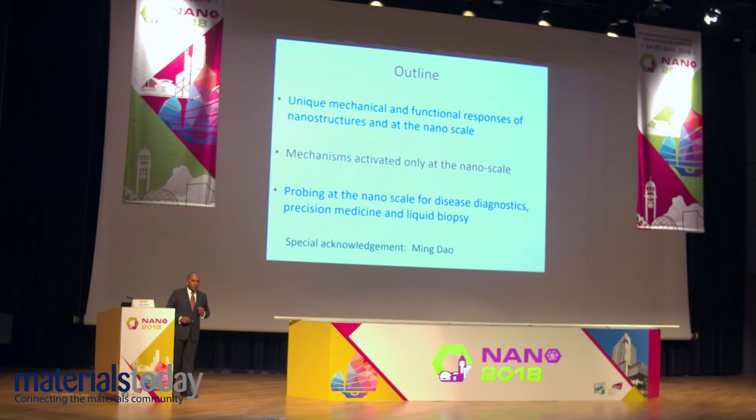So the outline for my talk is as follows. I would like to start with listing a few of the things that are unique to the nanoscale, then focus on mechanisms that are activated at the nanoscale, and then most of this talk will focus on advanced materials, material science. But given my path over the last 15 years, I would like to end the talk with one example where nanoscale features play a very important role in disease diagnostics, precision medicine, and liquid biopsy.

So what are some of the things that are unique to nanoscale? There are many, and I cannot list them all here. I'm just going to focus on a few of these. Of course, we have very high surface to volume ratio, low defect density in many of these systems, and proximity of these defects to free surfaces, limited number of defect nucleation sources, such as Frank-Read mechanism for dislocation multiplication, etc.

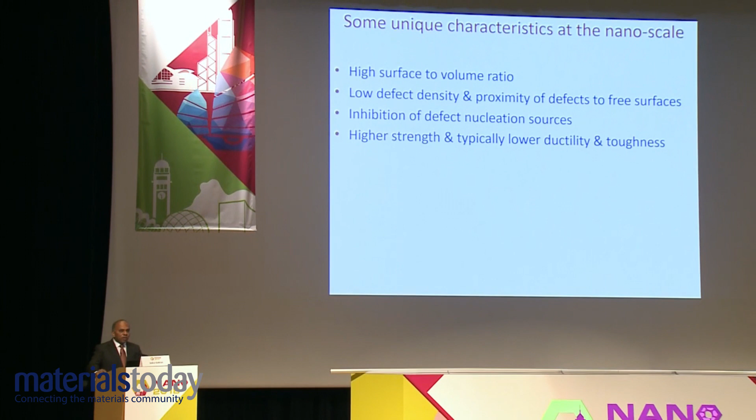Inhibition of defect nucleation sources, typically with decreasing grain size, very rapid increase in strength through Hall-Petch type mechanisms, and of course as the grain size approaches very small dimensions, the so-called inverse Hall-Petch relationship.

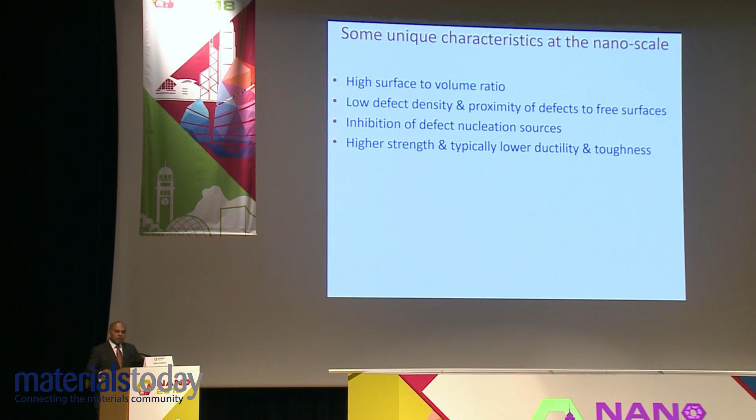Typically, increase in strength is accompanied by low ductility, toughness, damage tolerance, and resistance to fatigue crack propagation. Greater environmental susceptibility and possibly toxicity as well in some cases.

But there are also some advantages of nanoscale structures. We showed a few years ago that if you take single crystals of, say, aluminum, the mere act of mechanically cycling it at room temperature so that you impose a stress that's large enough to unpin dislocations and move them close enough to the surface so that the image forces can attract them and take them out of the system, but not large enough to create new additional dislocations, can lead to healing of the material, which is essentially a beneficial fatigue effect due to cyclic loading.

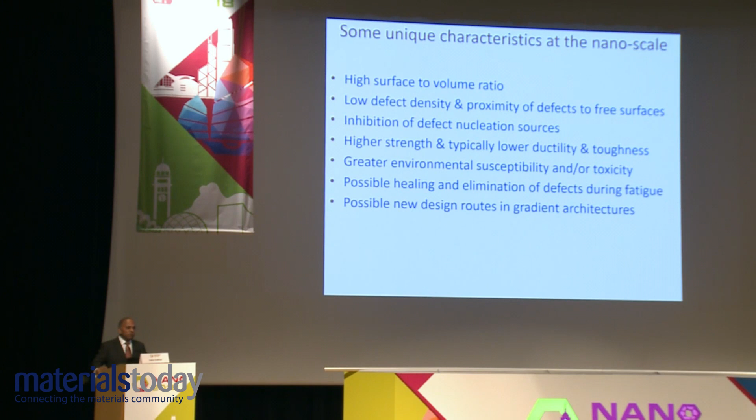Elimination of defects due to mechanical loading in certain nanosystems under certain conditions. There are a number of gradient architectures that one can create with nanostructures, not all of which have yet been tried in research, which have potential for significantly transforming material design and surface design, and I'll show some examples of this. And of course, many more.

One of the nice things about nanostructures and nanoscale materials is that combined with advanced additive manufacturing techniques such as 3D printing, one has the opportunity to create unique new architectures and materials that are digitally designed, involving both computational and experimental approaches. I'll show some examples, not through 3D printing, but that can potentially be applied through 3D printing as well.

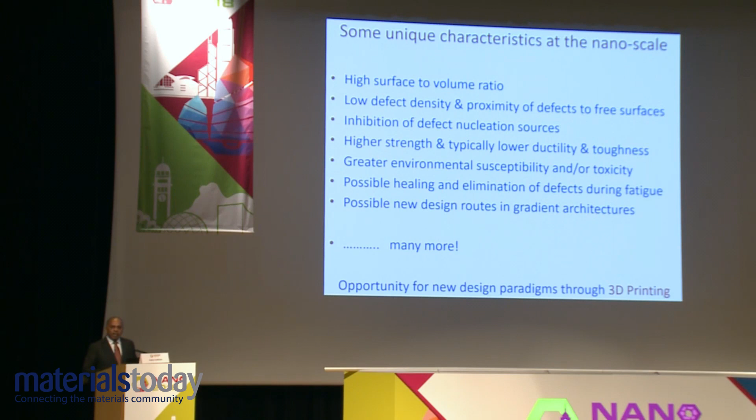So rather than going into general things, I thought I'll focus on a few examples and go into them in sufficient detail. Since we are in Hong Kong, I'm really delighted to show the first example, because this is some very recent work from a couple of months ago, where in collaboration with colleagues from the City University of Hong Kong, we showed some phenomena in diamond which can only happen at the nanoscale.

So essentially, bending of diamond at the nanoscale. Colleagues at the City University of Hong Kong, here the names are listed, Professor Zhang and his co-workers have been working on nano diamond for quite some time. If you take a silicon substrate and deposit a thin film of diamond on top of it through plasma-enhanced chemical vapor deposition, and then use etching to create needles where the height of the needles is of the order of 200 or 300 nanometers, and the diameter is probably less than 100 nanometers, you create many of these diamonds on a substrate.

We all know that diamond is the hardest material found in nature, and it's very difficult to deform diamond elastically beyond a small amount. Typically, when you go to a strain of as small as 0.15, 0.16%, diamond undergoes catastrophic fracture. It has high strength, of course.

So is it possible under nanoscale to deform diamond to sufficiently large reversible elastic deformation that cannot happen under micro and macroscopic conditions? That was the fundamental question.

So we decided to try this using some of the latest tools that have become available in the last 10, 15 years or so. We take these diamond needles on a substrate inside an SEM where we can use a diamond tip in a nano indenter to either push it down or come sideways and bend it and see how much it bends. And we can try to impose different amounts of controlled elastic deformation.

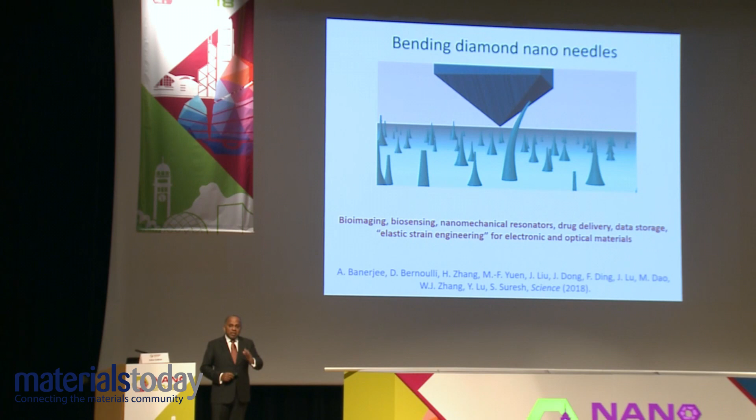Now, why would we even expect or hypothesize that there is the likelihood of large elastic deformation in diamond? First of all, at the nanoscale, if you can create pure surfaces, the possibility of defects in diamond is relatively small. In single crystals and very small volumes, the possibility of creating smooth surfaces and defect-free materials is large. So maybe there is an opportunity at the nanoscale that we are able to deform diamond.

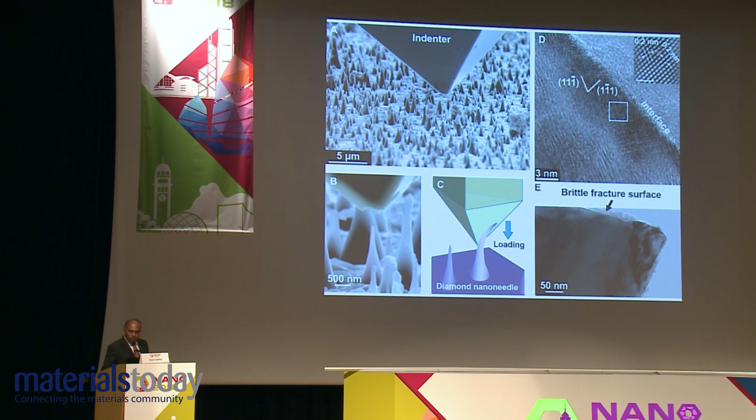So here is a series of still images from the videos taken in the experiment showing how the diamond deforms. This is in a single crystal. In the top row, as the indenter tip comes down and starts to deflect the diamond, you can see the diamond being bent, the needle tip being bent.

And if you don't reach a critical threshold value of stress or force, but you retract the diamond tip, the needle goes back to its initial shape. That's what happens in the top row.

In the bottom row, if you do the same thing but exceed the point at which fracture is initiated, you see the catastrophic fracture in the middle of the figure, in figure B3, where the diamond needle is catastrophically fractured. And you see the fracture surface in B4.

Figure C shows the load displacement curve for this failure mode of pushing diamond. You see an elastic response. The blue data points show the deformation before catastrophic fracture. So we unload it, we go back, and then we reload it. You see a little bit of hysteresis because of friction between the diamond tip and the nano needle.

But if you redo the experiment after unloading, if you reload the same nano needle, you see the red curve. In the case of the red curve, we go all the way to the point of fracture where the diamond catastrophically fractures. To your extreme right is the finite element simulation that takes into account anisotropy and nonlinear elasticity.

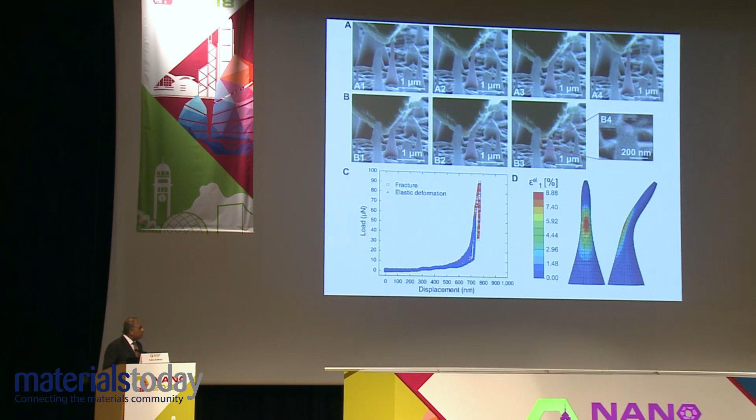What is plotted here is the maximum elastic strain, and in this case it's a tensile strain shown in different colors. The maximum point on the tensile side of bending, the strain is of the order of about 9%. So essentially, with diamond, we can deform it at the nanoscale in a way you cannot do at macro or micro scale, locally to a maximum strain of up to 9%. That's what this shows. Now you see that in video, both experiment and simulation.

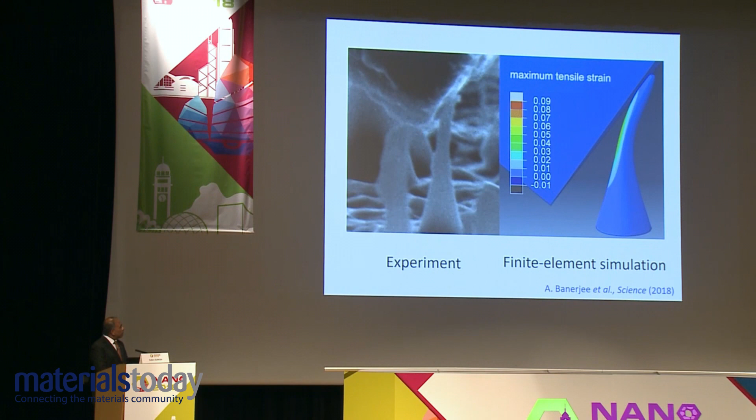When you do a large number of these repeat experiments in single crystals, there is a little bit of friction. So in our computational simulations, we tried to understand the effect of friction on the strength that we get. What is plotted here is maximum elastic tensile strain for single crystals under two different conditions.

Elasticity refers to deformation without fracture, where we unload. What is the maximum stress, maximum tensile strain we can get without fracturing? And in the case of specimens that fractured, what is the maximum tensile strain? Of course, when we create these diamond needles by etching, there is variation in geometry, friction, height, etc. So it's not surprising that you get quite a bit of variability in experimental data.

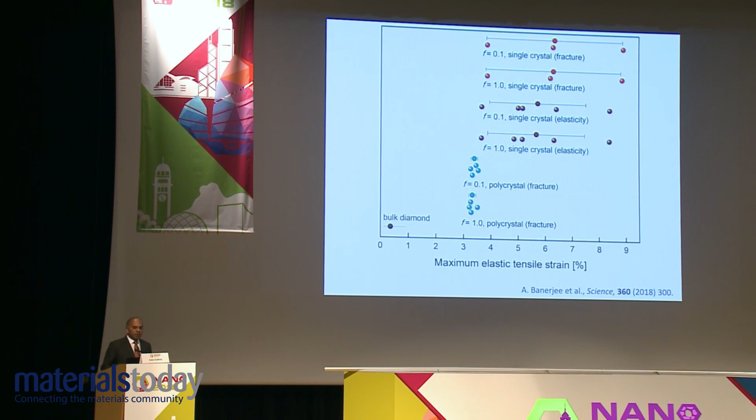What you find is that the maximum elastic strain in the single crystal case is between 4% and up to 9%. We also did experiments in polycrystalline diamond, where the scatter is much smaller. You can see the data for elasticity and, in the case of fracture, for two friction coefficients, 0.1 and 1.0. In both cases, for polycrystalline diamond, you get a maximum elastic tensile strain of about 3% or so. For comparison, bulk diamond has a much, much lower tensile strain, as expected.

We also did density functional theory and molecular dynamics calculations of stress strain curves. What is plotted in black is the stress strain curve from a DFT-MD calculation, where we found that the maximum tensile stress is of the order of about 140 GPa, and the tensile strain at which fracture is initiated, at least according to the calculation, can be as high as 13%. That's the point at which carbon bonds tend to break in this particular simulation.

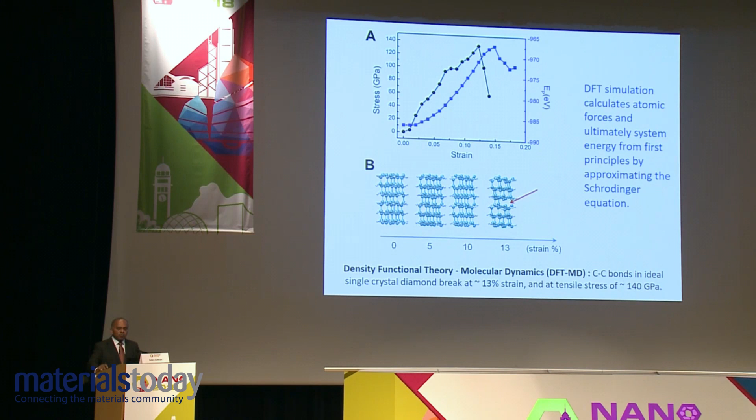When this paper's findings were reported a couple of months ago in Science, in an introduction to our article, Professor Javier Llorca from Madrid presented this figure in a perspective, which was very interesting.

The maximum tensile strength that has been achieved in one-dimensional carbon, which is carbon nanotube, is of the order of about 100 gigapascals. In 2D carbon, or graphene, the maximum strength shown is of the order of up to 120 GPa. In our experiments in nano needles, the maximum strength in 3D that we demonstrate is of the order of about 100 GPa. This is an interesting way to look at this.

There are a number of potential applications of these kinds of effects. There is an entire field called nitrogen vacancy centers, where you can create a vacancy with nitrogen, and that has unique optical and optoelectronic properties. There is a whole community of physicists working on this in diamond.

You also have diamond as a biocompatible material being used or studied in research for biosensing, bioimaging, and drug delivery applications. Because diamond is also an electronic material, there is a significant opportunity to change band gap as long as you can induce elastic strains through so-called elastic strain engineering.

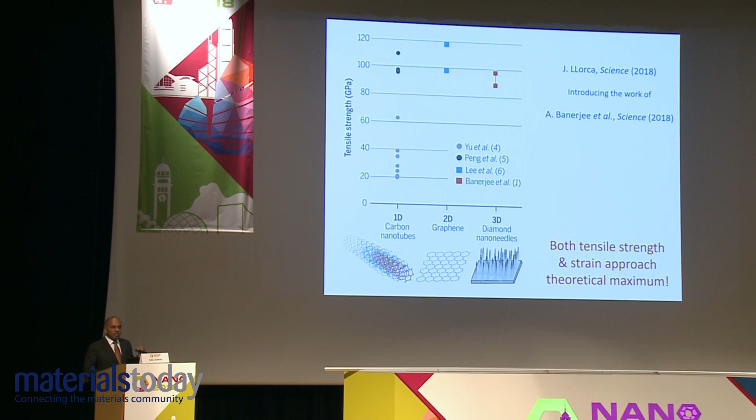So from that, I want to move to my second example. As we all know, everybody in this room has been working on aspects of this for a long time. One of the challenges we face in material science is to design engineering materials where, either through grain refinement, processing conditions, or composite strengthening, we significantly increase the strength of a material, something else gives. From a mechanical structural perspective, what gives usually is ductility, damage tolerance, fracture toughness, and fatigue properties.

So is there an opportunity to create various strategies so that we can increase the strength significantly, but at the same time try to protect a significant fraction of ductility, fracture toughness, and fatigue resistance, and in the process make sure we have enough damage tolerance and tribological resistance of the material for surfaces. This has been a topic of research for a long period of time.

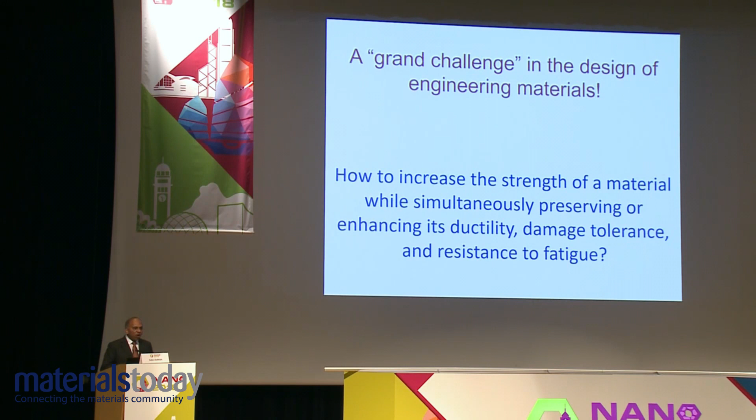I want to highlight a number of phenomena that have been identified by many people that happen only at the nanoscale. Professor Jian Lu, our conference chair, and his colleagues have been working on a particular type of structure where you can induce twinning through mechanical means here in Hong Kong. There are other techniques that have been proposed.

So I was in Doha in Qatar about 4 years ago. From our hotel room we looked out the view, and there was a nice building, and my wife said, 'Isn't that a beautiful architectural design?' And my first thought was, that's a very nice twinned microstructure, being a material scientist.

So this is an example of a macro twin. Professors Lei Lu and Ke Lu in Shenyang have been working for the last 12 years or so creating various strategies of inducing nanotwins which show unique properties.

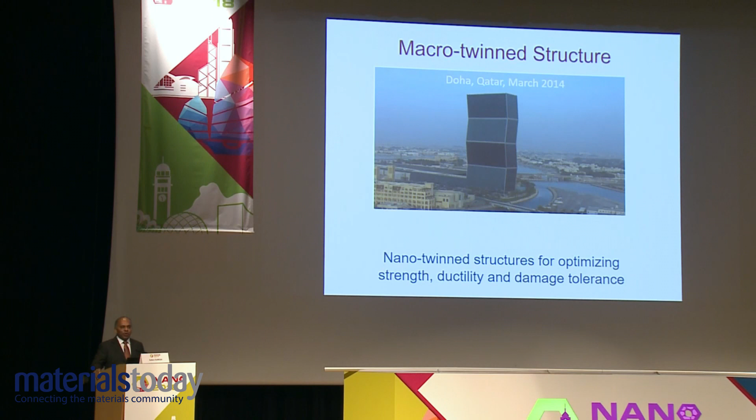Some of their work showed that perhaps we can use nanotwins not only to significantly elevate strength, but also to preserve ductility. So about 9 years ago, Lei, Ke, and I looked at some of their results and some of other people's results in the community, and tried to identify minimum criteria required to ensure we have the opportunity to maximize strength while preserving ductility.

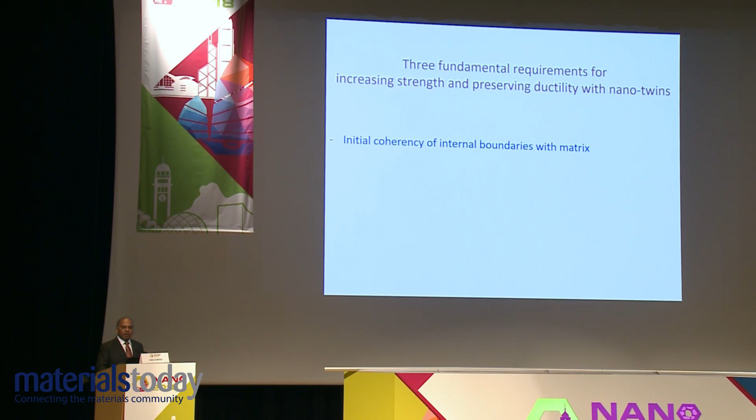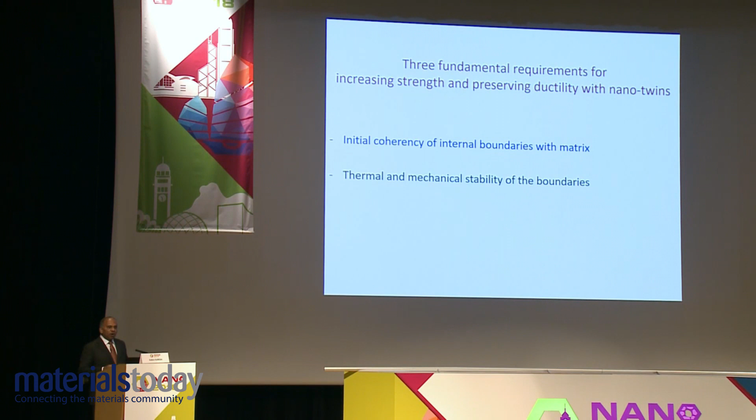What are the requirements? We identified 3 requirements. You need to create internal boundaries that at least have initial coherency, mechanical coherency, with the surrounding matrix. You need to have thermal and mechanical stability of the boundaries during mechanical loading, whether it's monotonic or cyclic loading, at room temperature or at elevated temperatures.

And then in addition to that, there is something unique about the nanoscale, things that you don't see at the micro scale. At the nanoscale, if the internal boundary feature size is typically finer than 100 nanometers, then if all 3 conditions are satisfied, you have an opportunity, at least in theory, to create a structure that has increased strength and the potential for reasonable ductility.

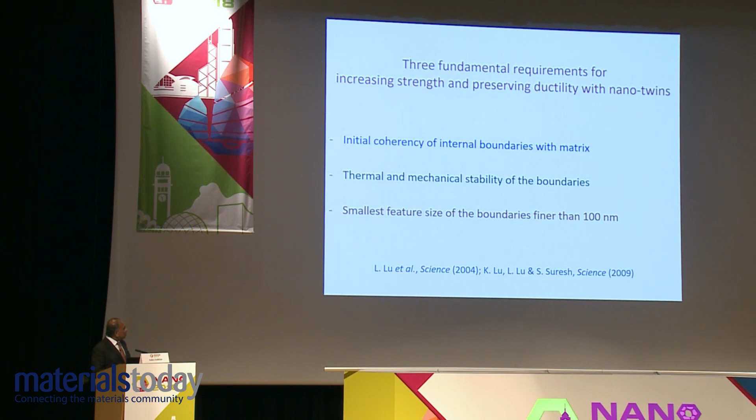And of course, these specimens have been manufactured using techniques where we cannot create very large structures for very large structural components, at least not yet. So in an article in 2009, we looked at the effects of these, and here is an example of a typical microstructure that has been produced.

On the left-hand side you have copper, a very finely twinned material, where the twin spacing, lamellar spacing, is on the order of a few tens of nanometers. The middle one shows something on the order of 70 or 80 nanometers. And on the right-hand side you see a material of the same grain size, but essentially no pre-existing twins.

So if you compare the 3 cases, obviously with very finely spaced twins you get the highest strength. You also have the opportunity to get higher ductility and even some beneficial fatigue properties. But there are other artifacts of this.

The activation volume of these materials is very different than conventional materials. And the other interesting result that comes out of this is the twin spacing in these nano-twin microstructures has an effect that's very similar to grain size effect in nanostructured materials, nanostructured metals.

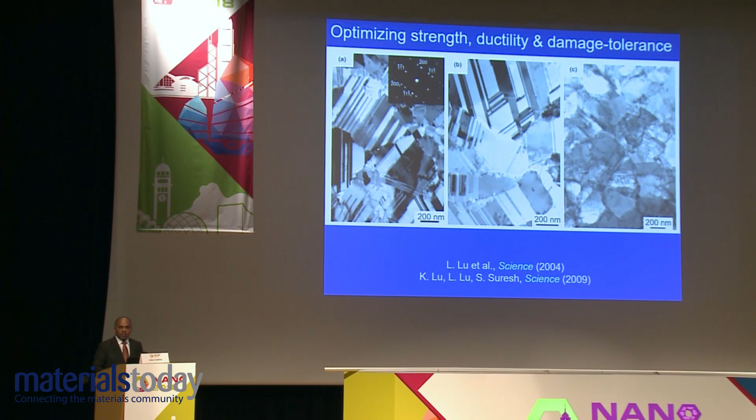So this is an example of one strategy that has been used among many, and I'm not going to go through all of these strategies. But one of the problems with this is, first of all, you don't get a big enough specimen to do the mechanical loading that is required, the minimum specimen size needed to do a valid fracture experiment or a fatigue experiment.

So now let's see what nanostructured materials do, how they behave when it comes to fatigue, which is one of the most critical practical applications and one of the most challenging as well.

So this is a classic SN fatigue curve that you would see, and here is an effect of grain size on SN fatigue life, as well as number of cycles to failure and the fatigue endurance limit. If you have a conventional microcrystalline material, this is nickel, a pure nickel, with a grain size of 10 micrometers or so, you get a few hundred megapascal endurance limit, approximately 40 to 60% of the yield strength or tensile strength of the material.

When you go from microcrystalline to ultra-fine grain material, when the grain size decreases to about 300 nanometers, your endurance limit increases by more than 50%. If you now go from ultra-fine grain to nano-grain material, where the grain size is of the order of 30 nanometers—this is electrodeposited nickel—the endurance limit still increases. So in high cycle fatigue, which primarily captures the life to initiate fatigue cracks, you get a beneficial effect of the high strength because of grain refinement in a nanocrystalline material.

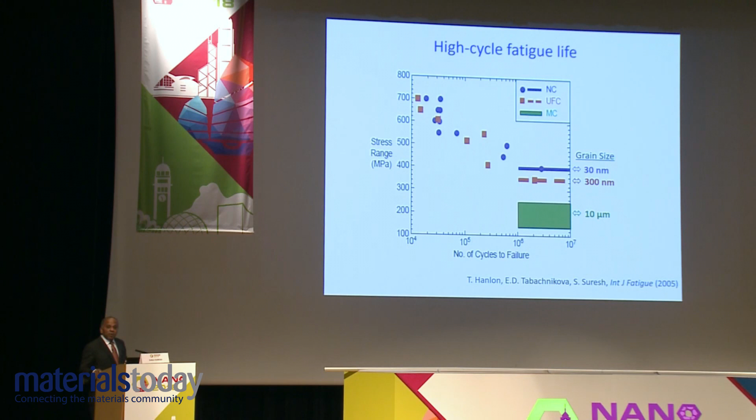But then, if it's strain control fatigue, you will see there is almost no data in the literature. There is very little data done with large specimens, because specimens aren't large enough to do a valid cyclic deformation test by controlling strains. So when you go to low cycle fatigue, you run into the problem that the beneficial effects of grain refinement begin to disappear.

The same thing happens in the case of nanostructured materials, shown on your right-hand side, with data in nanocrystalline nickel, ultra-fine grain nickel, and microcrystalline nickel. So what is beneficial for high cycle fatigue is actually not so good for fatigue crack propagation, especially at low crack propagation rates in the near threshold regime, where conventional coarse grain materials perform much, much better than a nanocrystalline material.

We can try to overcome that by tricking the material by introducing initially coherent internal boundaries at the nanoscale, which are also thermally and mechanically stable. And that's what is shown on the left-hand side.

So for 3 different nano-twin cases, you have twin spacing of 30 nanometers, 85 nanometers, and 450 nanometers. This is work done in collaboration with Lei Lu and her student in Shenyang, and my PhD student, Aparna Singh, at MIT. What you see here is that when you introduce nano-twins, there is an opportunity not only to preserve ductility while increasing strength, but also to provide some improvement in fatigue crack growth resistance.

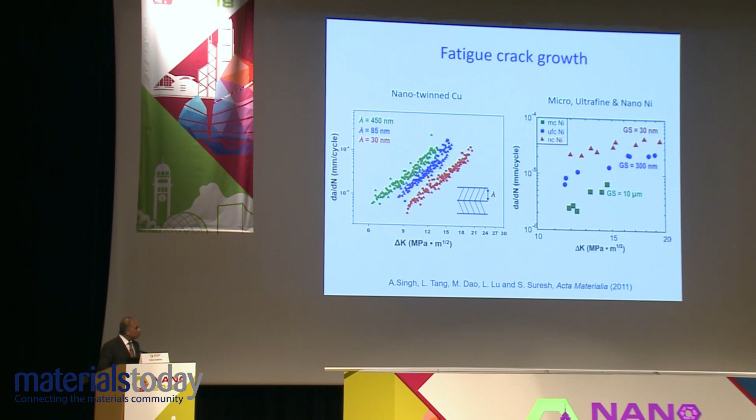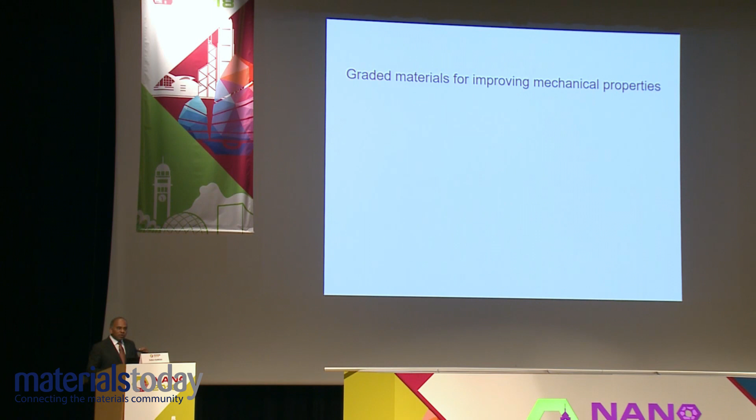For this, we resort to graded materials as a strategy. I'm going to show some very recent results, again in collaboration with Lei Lu and her team. But before going to that, I want to give a little introduction to what has been done by different groups in different mechanical properties with respect to graded structures, so that we can try to apply what we know for the last 20, 30 years to the nanofield and try to see if we can improve the properties.

Starting in the late 1980s, primarily through leadership from the Japanese materials research community, there were a lot of international conferences that were held, and a lot of very interesting work came out of it at that time.

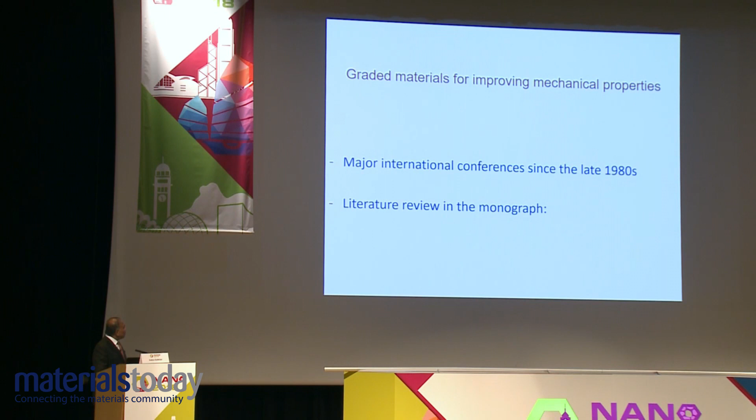Then there is a lot of literature survey done by many people, and I'm particularly grateful to Professor Andreas Mortensen in Lausanne, at EPFL Lausanne. We spent about 2 years in the late 90s summarizing the field and certain strategies in a monograph called Fundamentals of Graded Materials, published by the Institute of Materials in the UK in 1998.

Out of this emerged some strategies that I want to walk you through. Now we can try to apply them to nanostructured materials.

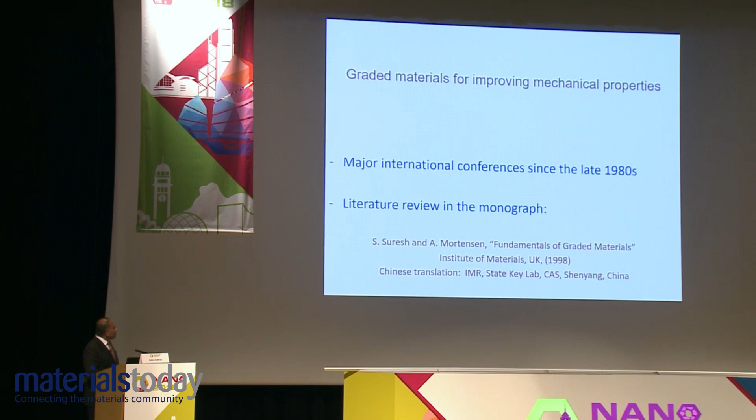The first piece of work that systematically, in a scientific way, demonstrated the benefit of nanostructured materials was in the late 1990s in ceramics. This is some work in collaboration with Professor Nitin Padture, who's now at Brown University, who at that time was at the University of Connecticut in Storrs.

Nitin and I had a number of joint students who were looking at ways in which we can create an elastically graded material that had no plasticity. Here is an example of a particular system. We take silicon nitride, fully dense silicon nitride, and then we take SiAlON glass on top of it. We melt the glass, and we can dope the glass in such a way that the coefficient of thermal expansion of SiAlON is very similar to the coefficient of thermal expansion of silicon nitride.

When you melt it, the glass diffuses into the silicon nitride substrate. Of course, glass has a Young's modulus of 110 GPa, and silicon nitride has a Young's modulus of about 300 GPa. So because of the diffusion, there is a continuous variation of Young's modulus at the surface of 110, about 200 GPa, 220 GPa, because it's part glass, part silicon nitride, to a depth of about 400 micrometers, where the Young's modulus is about 300 GPa. So that's the microstructure that you create.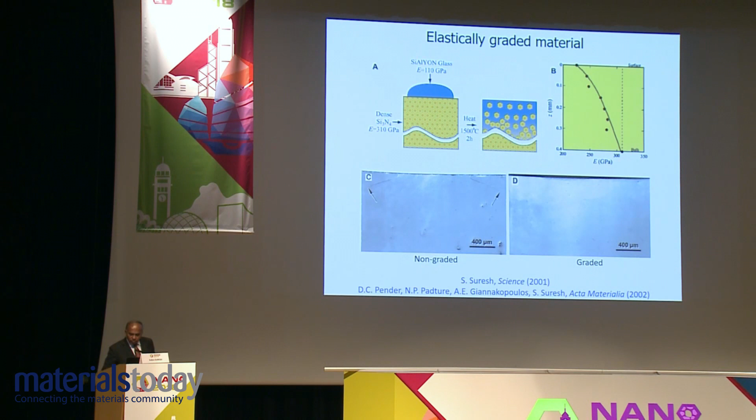And then a few years later at MIT, Ming and I had a joint PhD student, In-Suk Choi, who's now at Seoul National University in Korea. We looked at a plastically graded material where there is no elasticity gradient. So this is just the opposite of this. You have no change in elasticity, only a plasticity gradient.

So we create a surface layer, using some material that we produced at MIT in collaboration with Chris Schuh. We have a surface layer that's about 20 micrometers thick, a nickel tungsten nanocrystalline alloy. It has a grain size of about 90 nanometers. And then you have a small homogeneous layer of nanocrystalline material, and then a copper substrate. And then we do the indentation work.

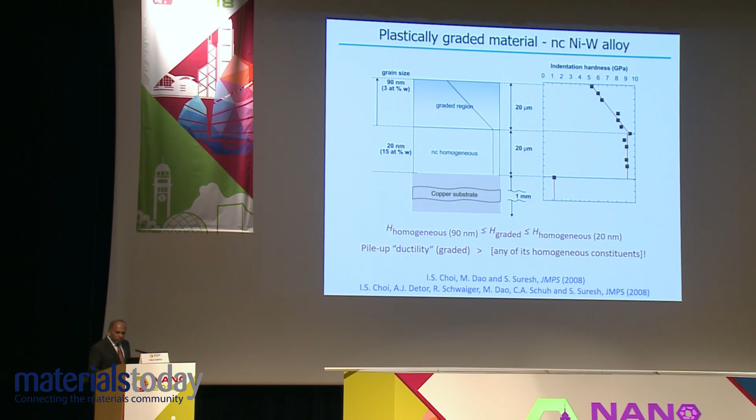And then we found the following: when you indent a graded material as opposed to any of the homogeneous materials, including the composite of different compositions, you find that the evidence of ductility in an indentation test, which is the pileup around the indenter, is the greatest in the case of graded material, because of the way you distribute the loads during indentation into the substrate for a particular mechanism. So this gave us an opportunity to look at plastically graded materials with nano gradients at the surface.

Here is the result that we found about 10 years ago. What is plotted here is the pileup height over the base height, HP over HR, as a function of microstructure. This is the nanocrystalline material only, coarse nanocrystalline material, and graded nanocrystalline material. This is experiment, and this is finite element simulation of the behavior. In all three cases, we find that the graded material has the most superior response in terms of indentation response, with one indicator of ductility being how the material is able to pile up.

So the moral of the story in all of this, whether it's an elastically graded material or a plastically graded material, you have the opportunity to trick surfaces to do things that you may not be able to do in a conventional way. This is where 3D printing, at least in principle, provides an enormous opportunity for design purposes.

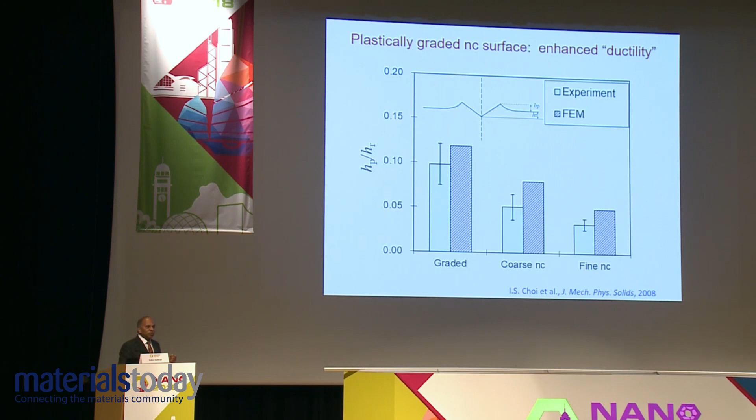Subsequent to this work, in the last 10 years, a number of groups in the community have published papers in various forums showing the possibility of creating graded nanostructures with which ductility-strength combinations can be optimized, homogeneous versus graded nanograin structures, etc. This particular figure is taken from a paper by K. Lu.

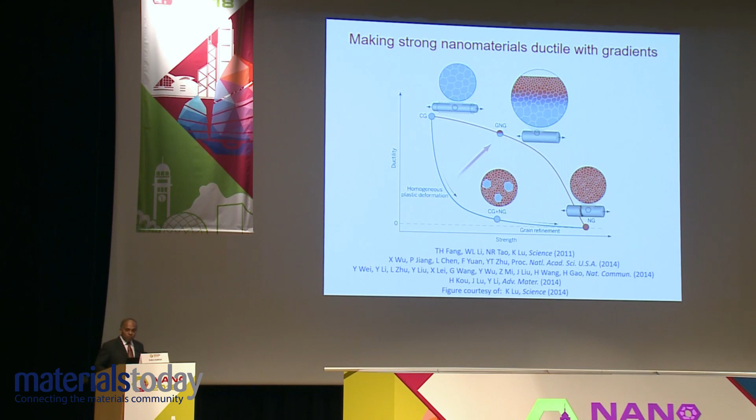I want to finish with two thoughts and a final example. This is some recent work in collaboration with Lei Lu on how we can trick a material that has very poor fatigue response by creating a nanoscale surface layer, but in a large specimen. Here we have a many-millimeter size specimen of microcrystalline copper, but we create a graded layer, an ultrafine layer, and a nano layer at the surface.

We mechanically fatigue it in cyclic loading at room temperature. As we do this, we find that over time, just as in any microcrystalline material, there is a continuous change in microstructure. In traditional materials, you form dislocation networks, dislocation dipoles, veins, persistent slip bands, which cause intrusions and extrusions, etc. In the case of copper that is surface graded, you have an opportunity to change this dramatically.

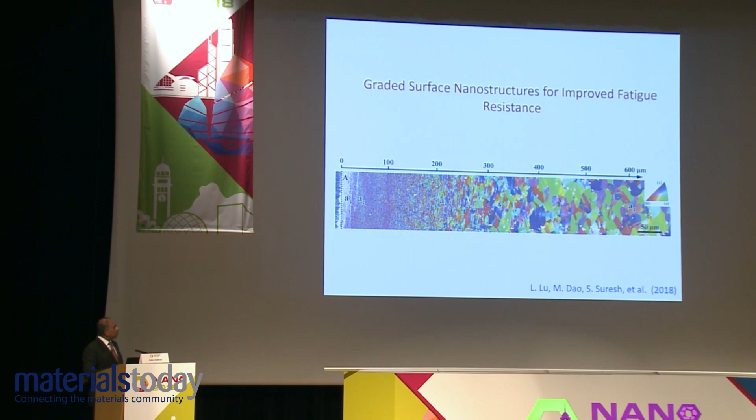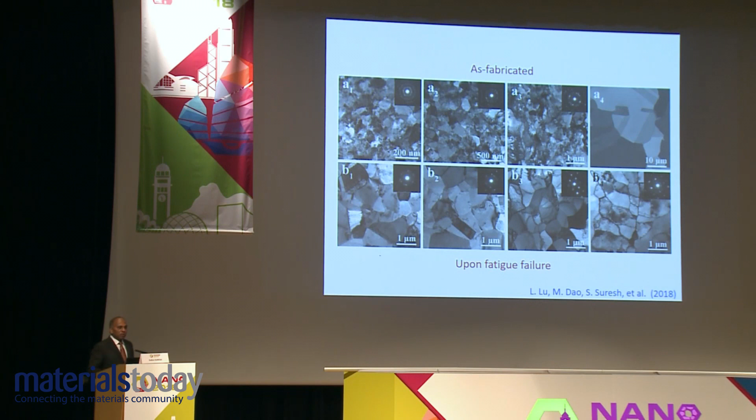Let's see what happens. In the as-fabricated condition, you get nanoscale microstructure at the surface—the scale here is nanometers. If you go deep into the material, you get microcrystalline material. But after some period of cycling, the microstructure homogenizes, and as a result, you get a nearly uniform microstructure of comparable grain size or cell size through the thickness of the material. That leads to some really unique fatigue properties.

Before testing, you have a very small grain size at the surface, and as you go into the material, you have a coarse grain microstructure. After a few hundred or a few thousand cycles, depending on the loads applied, you get a much more homogeneous microstructure. This is very consistent with work done 50 years ago in pure polycrystalline copper by Campbell Laird and co-workers, where if you start with an annealed microstructure you get strain hardening, and if you start with a cold-worked microstructure you get strain softening, but the final state is identical.

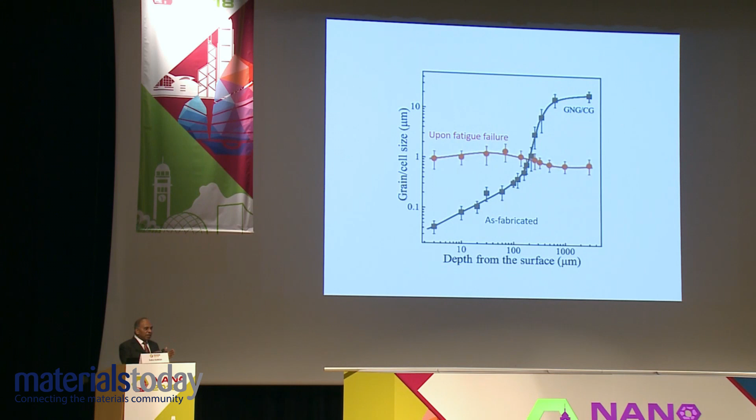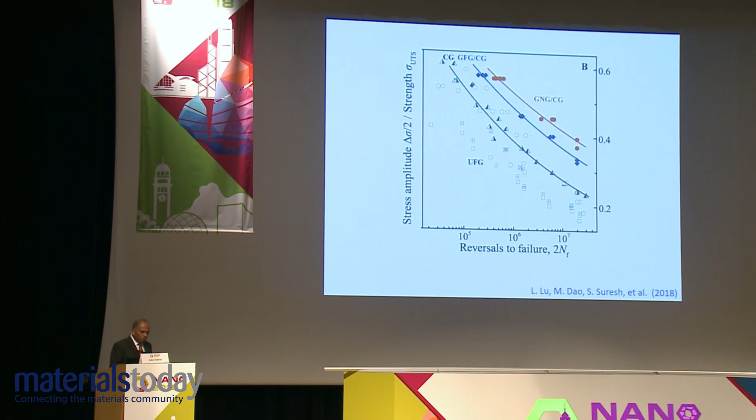If you go to strain-life fatigue—this is stress-life fatigue, this is strain-life fatigue—if you add that together you get the total response. The transition is called the transition life, denoted by 2NF with a subscript T. This indicates the optimum combination of high cycle and low cycle fatigue, stress-controlled and strain-controlled fatigue. So if you plot fatigue limit as a function of transition life, conventional materials are here, but you want to be in the top right, and the graded nano grain material has the best property of them all.

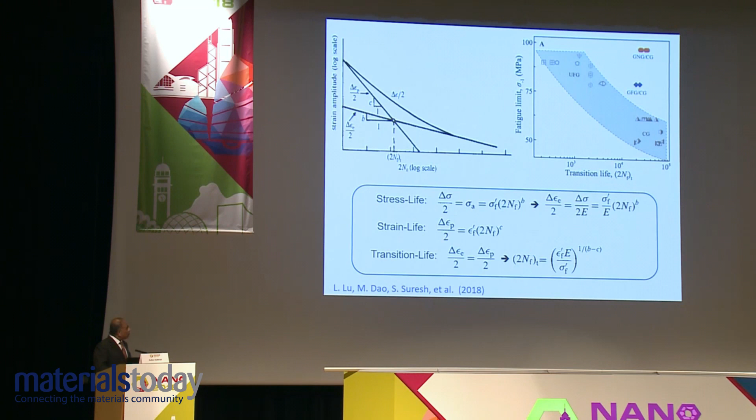Let me conclude with a very brief video on the implications of nanoscale in biological systems. This is in collaboration with Professor Tony Huang at Duke University, Dr. Yoel Sadovsky, who heads the Magee-Womens Research Institute in Pittsburgh, and my collaborator Dr. Ming Dao.

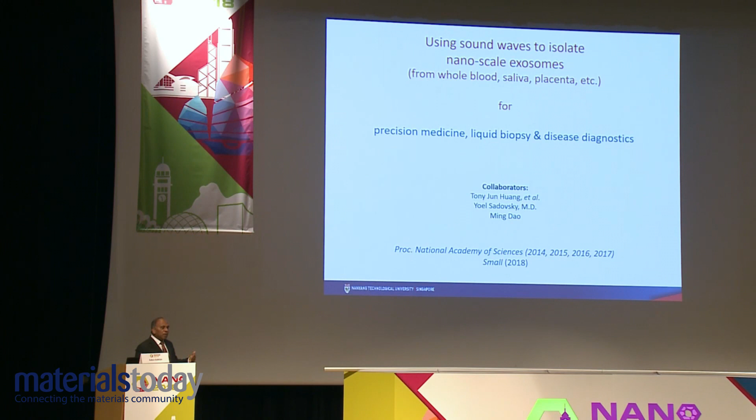What we do is the following: if you take a liquid fluid sample from the human body—whether a blood sample, a placenta sample in pregnant women, or a saliva sample—can you isolate the smallest nanoparticle you can find, typically an exosome or a vesicle, without introducing artifacts in the process? Once isolated, you can do all kinds of analysis for disease diagnostics, continuous monitoring, and in some cases, cell culture. This is the rapidly evolving area of precision medicine and liquid biopsy for disease diagnostics and other purposes, including monitoring during pregnancy.

The technique we use uses standing surface acoustic waves. Here you see a device built to study this—this is 10 US cents, a dime, so it's a really small device. And we have two interdigitated transducers.

These are the things that we have in our cell phones. So using a small battery, we can create a sound wave, which is a standing surface acoustic wave.

The principle behind this is very similar to what you find in ultrasound for pregnant women, and we know ultrasound is very safe for the human body. So it sends a sound wave, and if there is a microfluidic device in which there is a fluid flowing and particles are flowing in this, the sound wave causes a radiation pressure.

If you have two particles of the same size but different material properties, the stiffer particle will have a different radiation pressure than the less stiff particle. If you have two particles of the same material but different size, the larger particle will have a larger radiation pressure compared to the smaller particle. So in any case, we can create different radiation pressures, and we can separate them.

We found that we can do that with an efficiency of about 98%. So then we thought, if we can do this, can we take a whole blood sample and look at cancer cells versus healthy cells? The cancer cells will have different radiation pressure, and therefore we can separate the cancer cells from healthy cells. So we took a cultured cell line, we spiked the concentration of cancer cells, and the next video shows this.

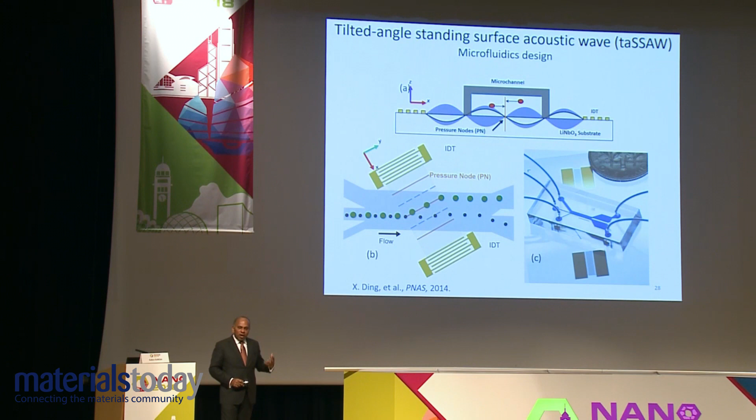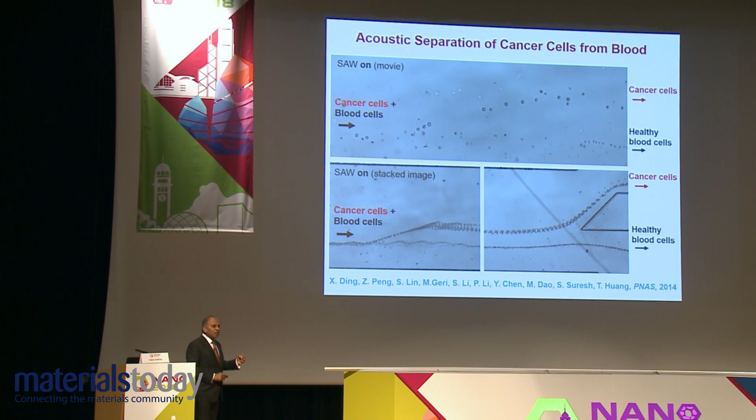So the top, we do the same device. Cancer cells go one way and healthy blood cells go another way. We did a study with 3 patients who had breast cancer at Hershey Hospital in Pennsylvania, and we were able to successfully isolate the cancer cells, 1 in 100,000 cells that's cancerous, from the samples from the patient.

So this is my last slide. I want to show what you can do with nanoparticles in whole blood. So this is essentially the technique. We take whole blood and put it into a microfluidic device that has 2 interdigitated transducers.

We create the acoustic radiation pressure. In the first phase, you remove all the red blood cells, the white blood cells, the platelets, etc. And then the smaller particles come here. We remove all the vesicles, etc. out and keep only the exosomes.

Exosomes are typically 40 to 130 nanometers in size, and they are the cargo that carry important information about physiology, health, and disease. They also carry other genetic information. So that's the goal behind this. Let me show the video that captures this.

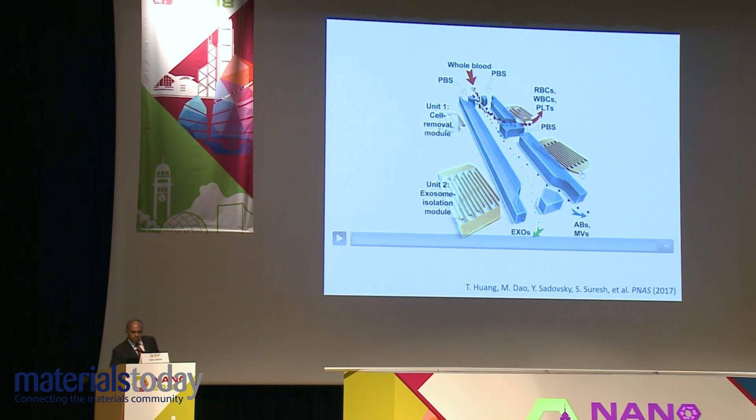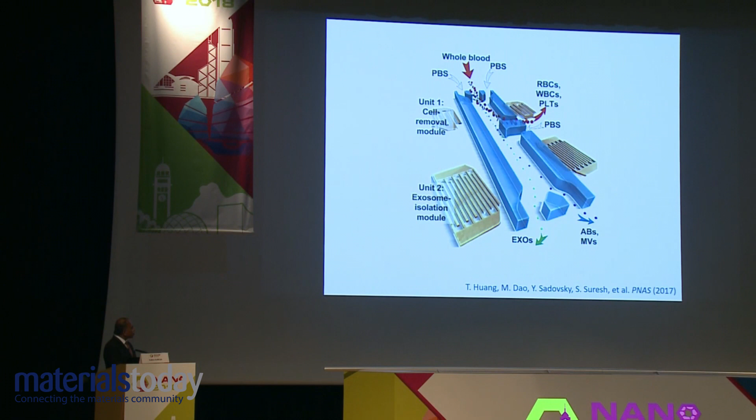The microfluidic device includes 2 subunits, each containing a pair of slightly tilted transducers. When sound waves produced by these transducers encounter one another, they generate a series of pressure nodes. Each time a cell or particle flowing through the channel encounters a node, the pressure guides the cell or particle in a particular direction to isolate it and ultimately remove it.

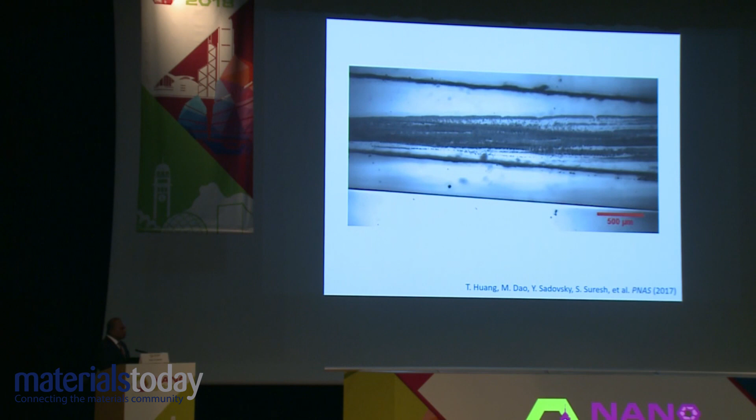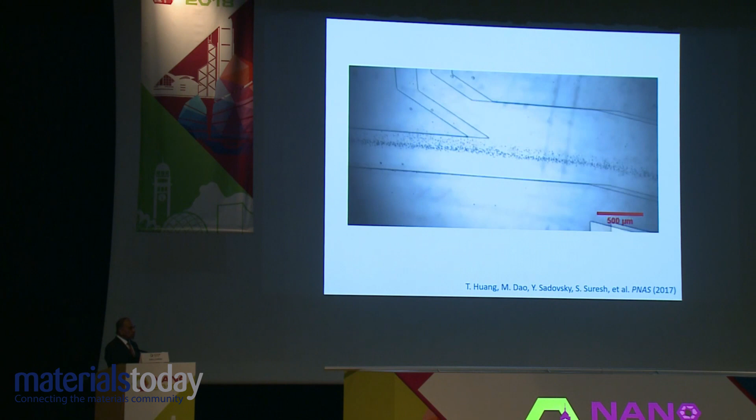In the first unit of their device, there is a lower driving frequency, which isolates larger particles such as red and white blood cells and platelets. The second unit has a much higher driving frequency and is therefore able to separate the smaller nanoparticles and isolate the exosomes from the remaining blood.

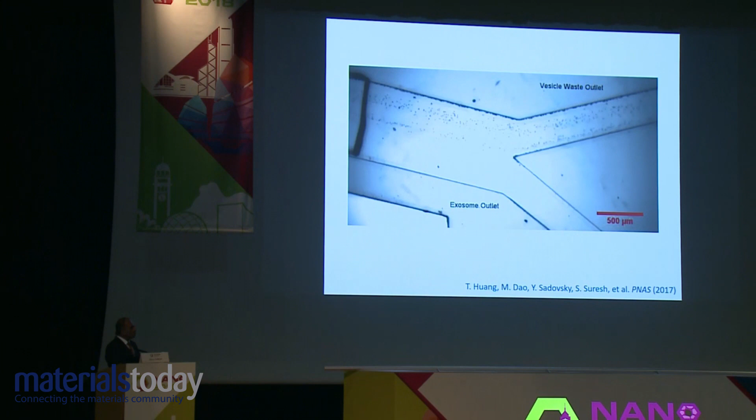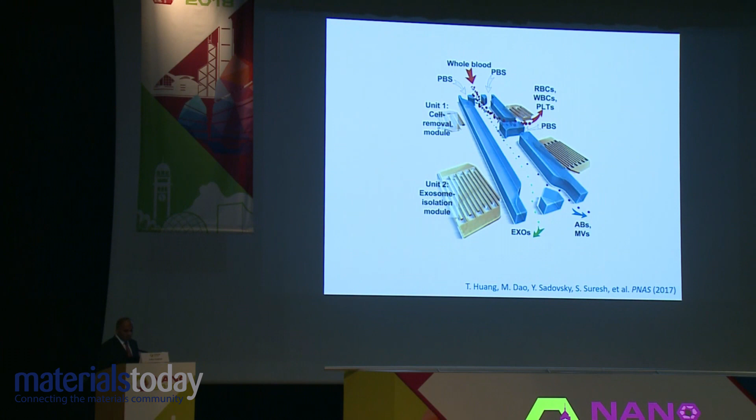The new method takes less than 25 minutes to process, compared to hours or even days using a centrifuge with a microfluidic device. So let me conclude.

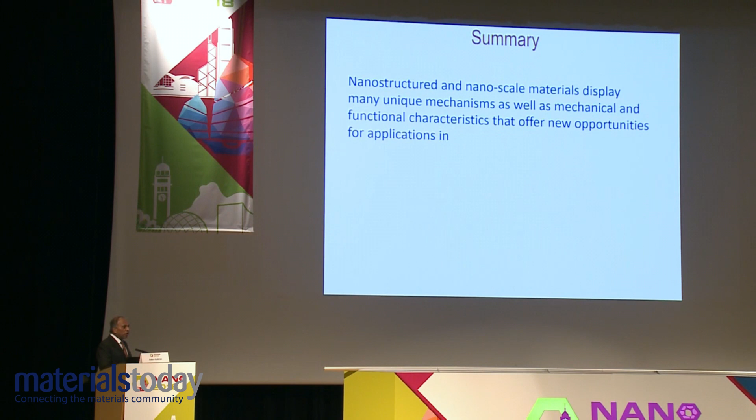Nanostructured and nanoscale materials display unique mechanisms, as we have seen in 3 or 4 examples that we just described. There are a variety of potential applications, from 3D printing, where we can print on the surface different particles mixed with ultrafine and microparticles, a variety of MEMS and NEMS devices, graded materials design, bioimaging, biosensing, drug delivery, diagnostics, nanomechanical resonators, data storage applications, and more broadly, elastic strain engineering for electronic and optical materials.

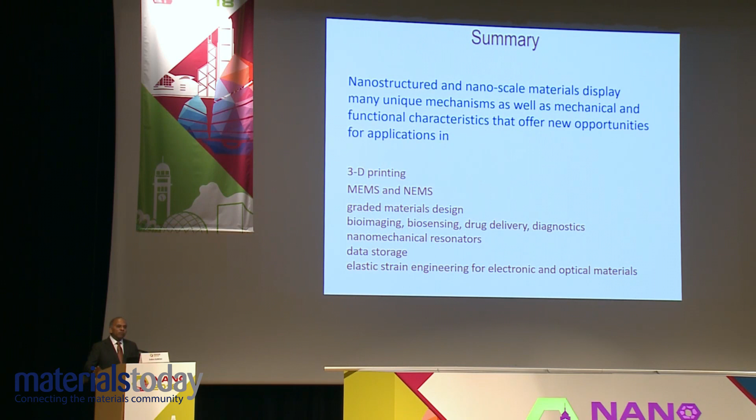In fact, I'm very optimistic about the possibilities that this field provides, especially since there are a lot of young people in the audience. There is a tremendous opportunity in so many different fields where mechanisms have been identified at the nanoscale, either with nano microstructural features or overall nano dimensions of a material, that are not seen at the higher scales for a variety of these applications. Thank you.